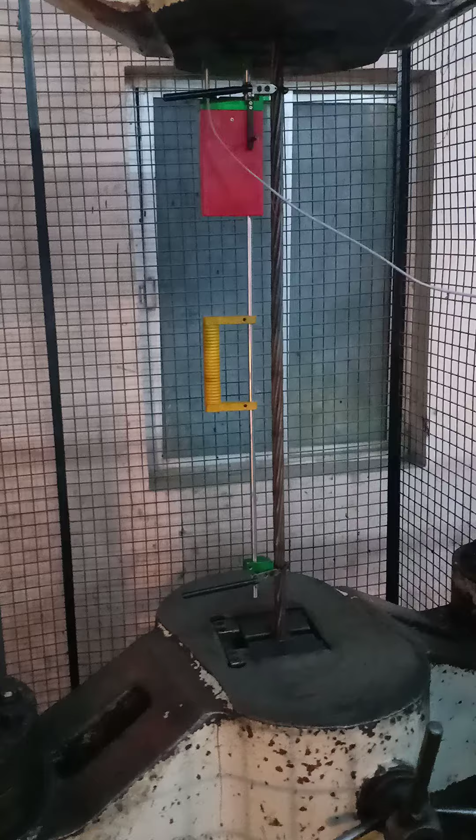Hello everyone, today I'm going to show you a testing of a strand wire on a 600 gauge length. So you can see we are using a computerized model UTM machine. So right now our extensometer is fixed, and it's a 15.2 strand wire. So I'm going to perform this test.

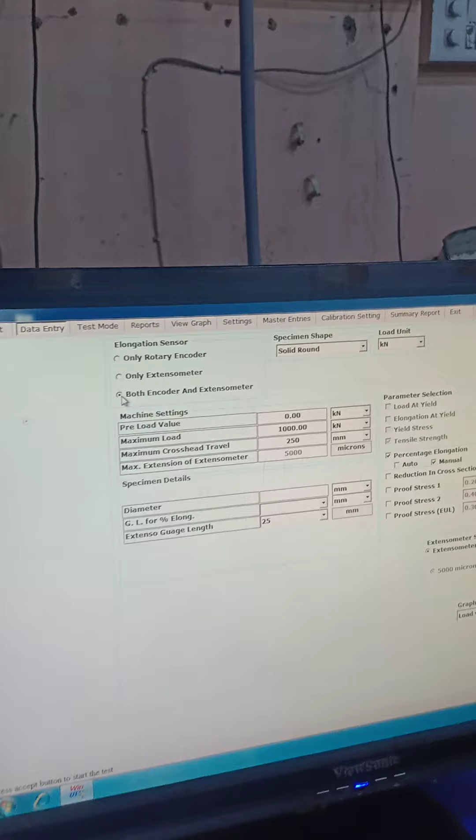This is our standard software. Giving the input data. So here I'm going to select both data, both encoder and extensometer. Diameter is given. Now I'm going to select the gauge length for percentage elongation, gauge length for extensometer, proof stress at 0.2%,

extensometer 2, as we are using two types of extensometer in this. So the 600 gauge extensometer is extensometer 2, so we selected that one. Hydraulic is on now. So giving the file name.

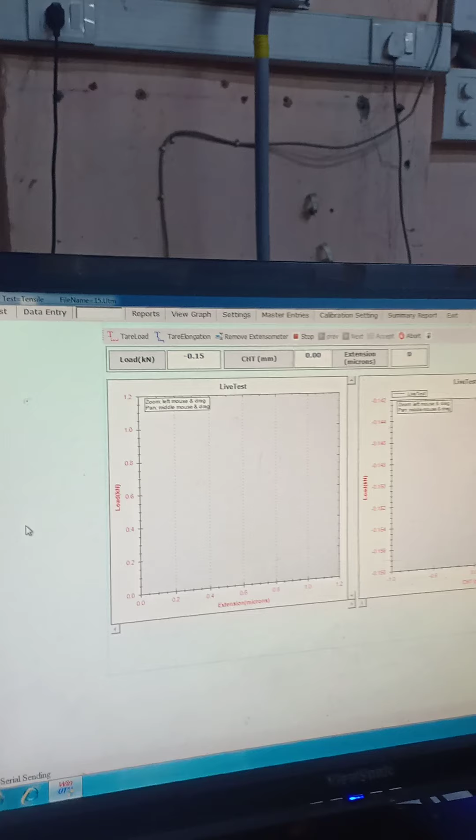Sir, sir. Okay, sir. Tare load.

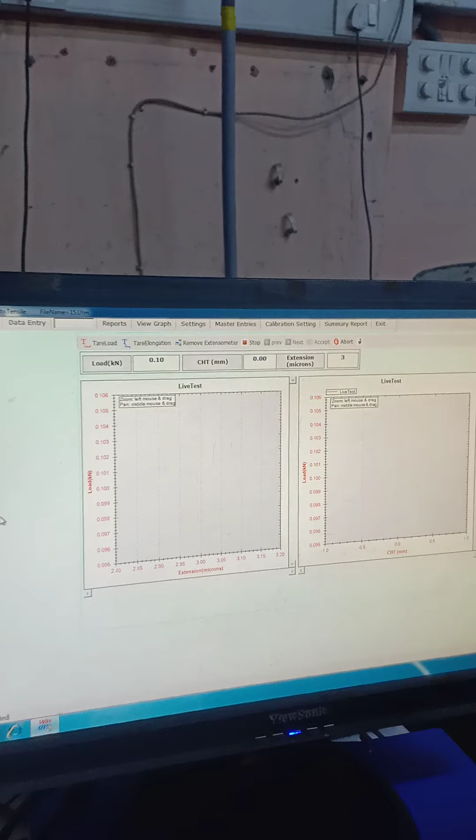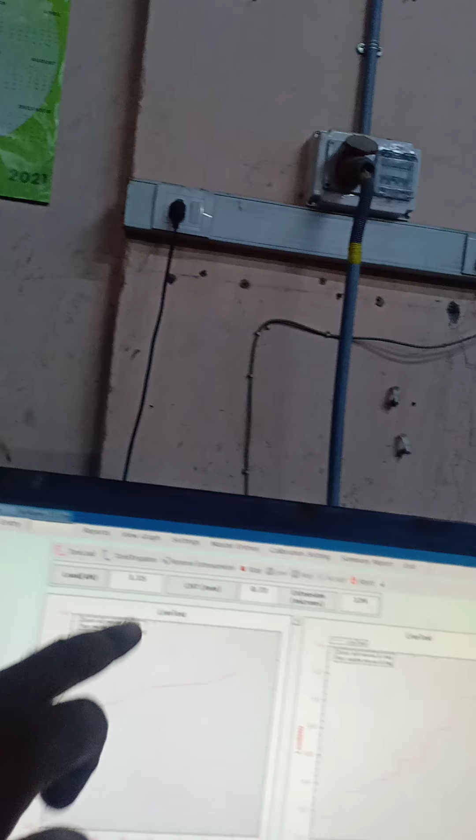Okay, now our testing has been started. So you can see in the report, this is the load versus extensometer graph and this is the load versus displacement graph. So all our data has been started. Load value, this is the displacement value and this is the extensometer value.

We remove the safety pin from the extensometer. Now our extensometer is traveling.

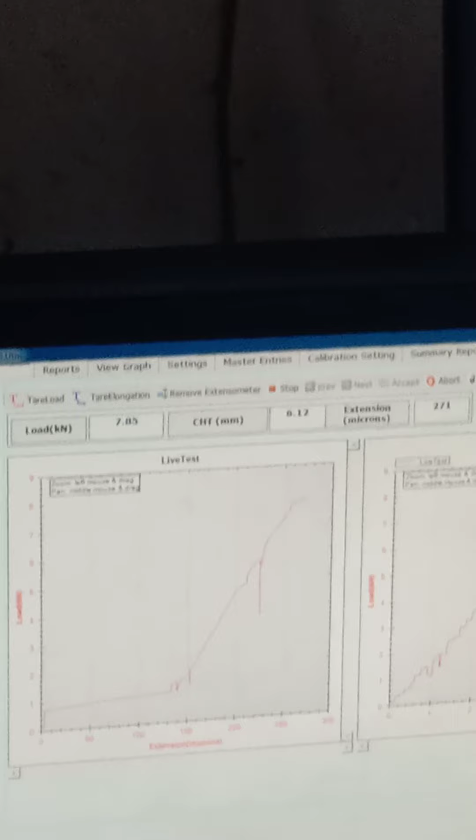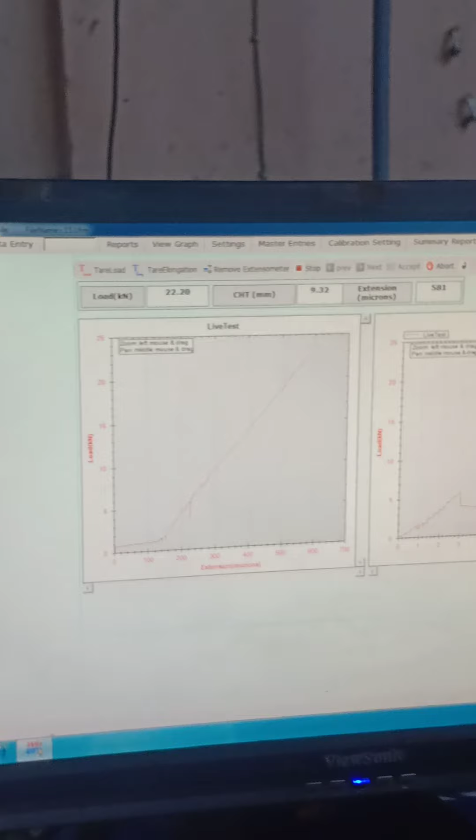Load versus extension graph. Load versus displacement graph.

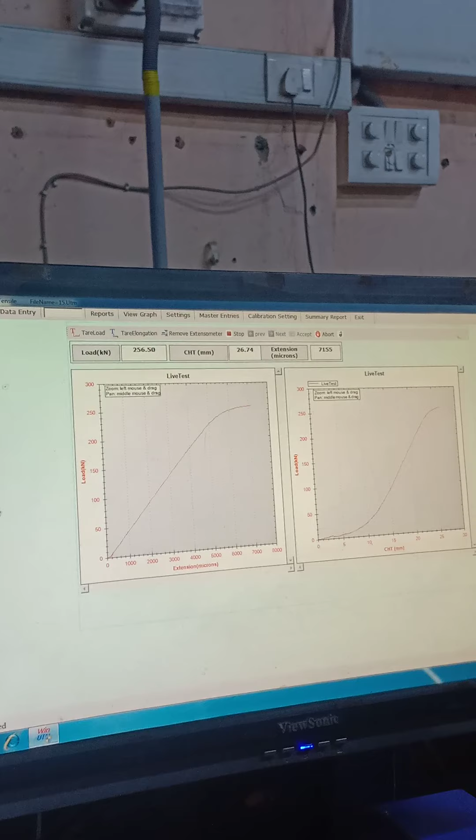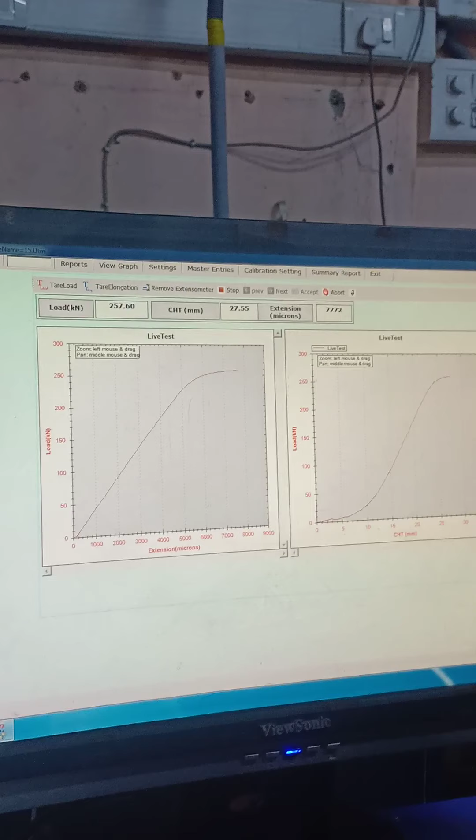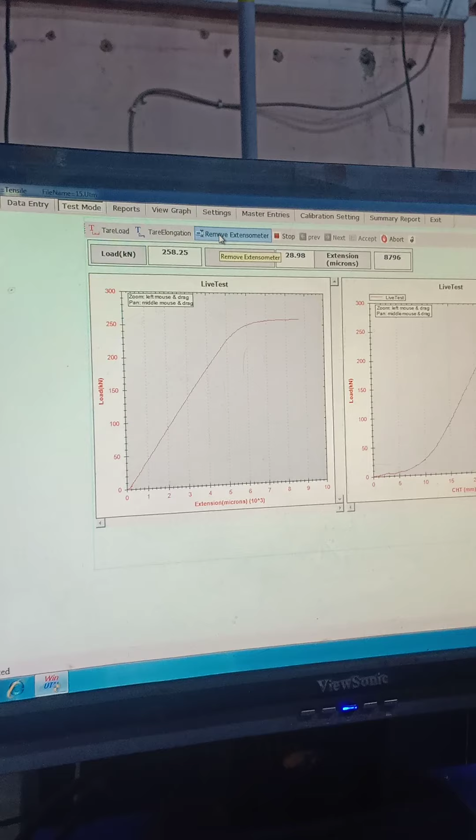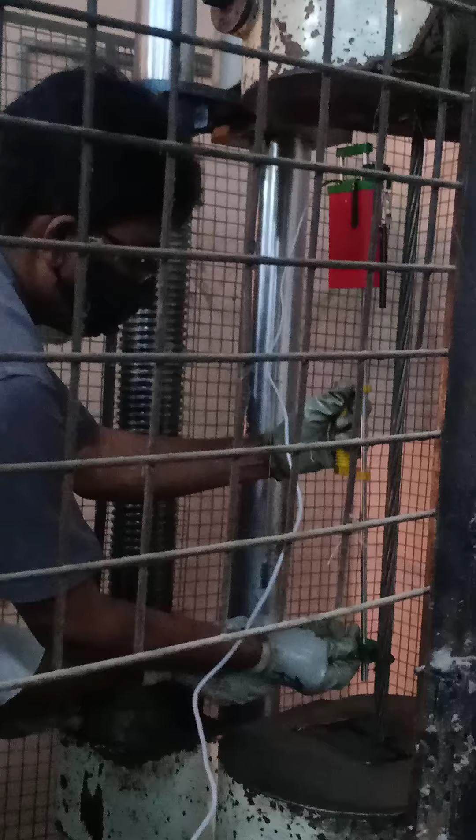Just when 'remove extensometer' comes, we need to remove our extensometer. You can see a message below there, remove extensometer. At that time we need to remove the extensometer. Now our extensometer has been removed.

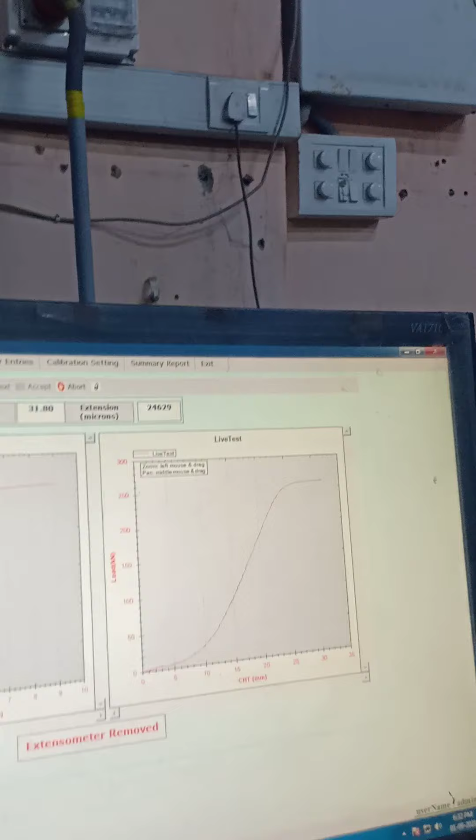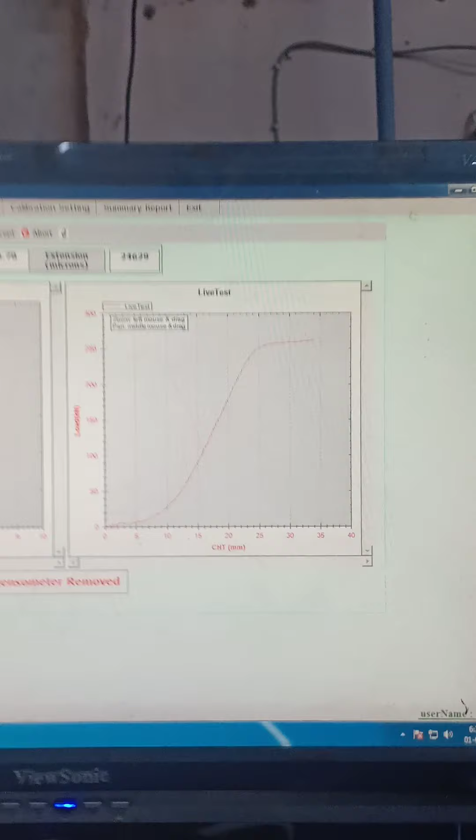Now you can see this graph has been stopped here and only the load versus displacement graph is now moving. So from this graph we will get the 0.2% proof stress, and this is the graph for the rest of the data.

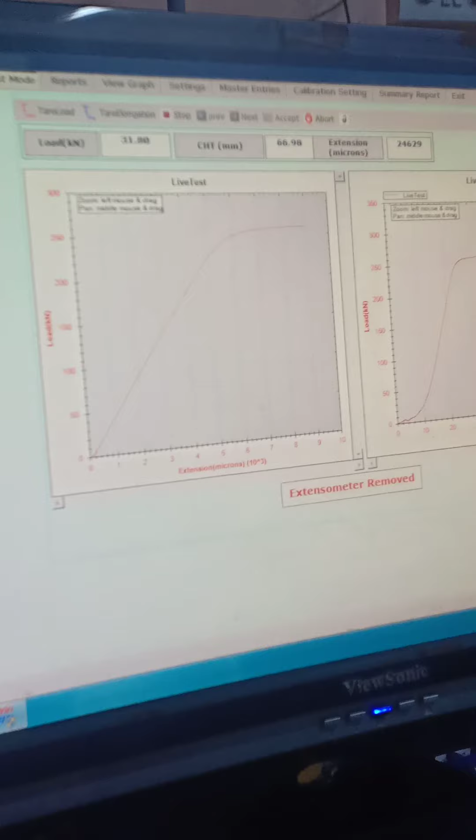So our component has been completely broken down. This is our software data. Stop. Okay. See, now we need to give the final gauge length for percentage elongation.

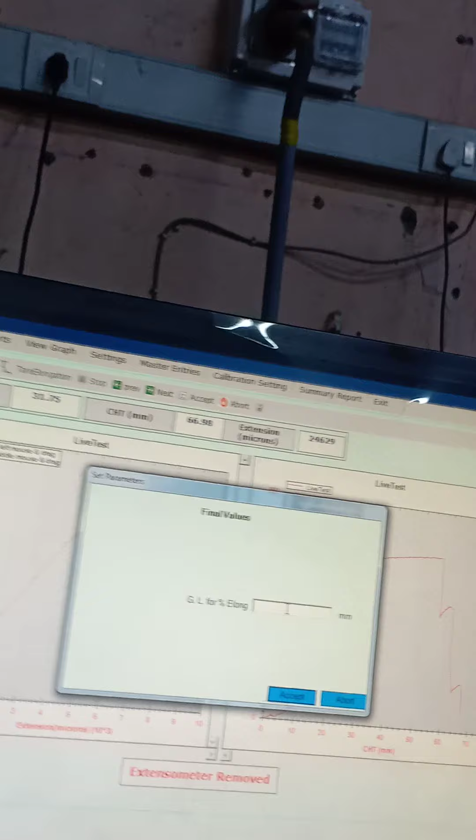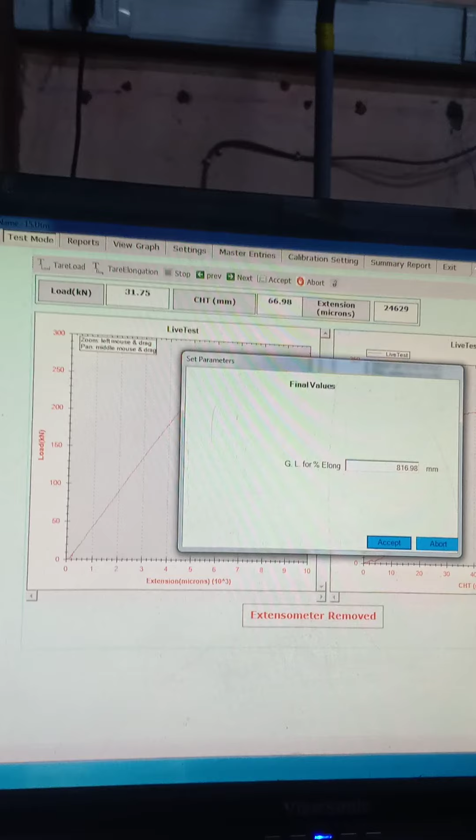Yes, from gauge length. Okay. Accept. Now this is the Young's modulus, which our software automatically calculates. Yes. Now for calculating the proof stress we need to select 2 points. Yes. Then now going to select the first data.

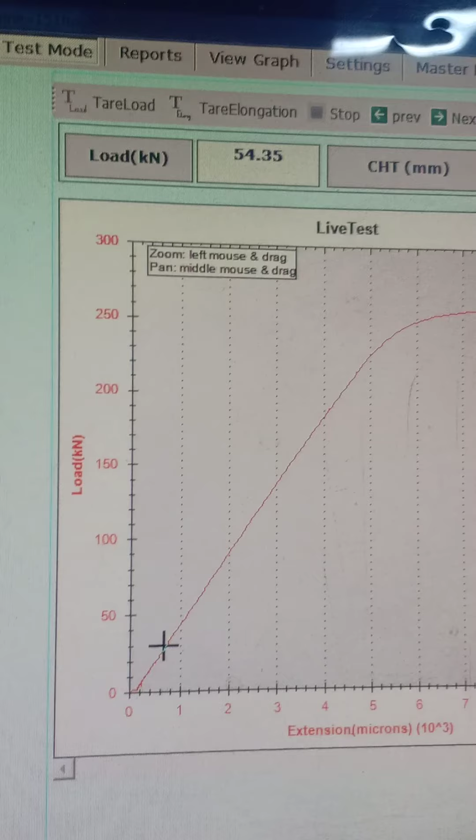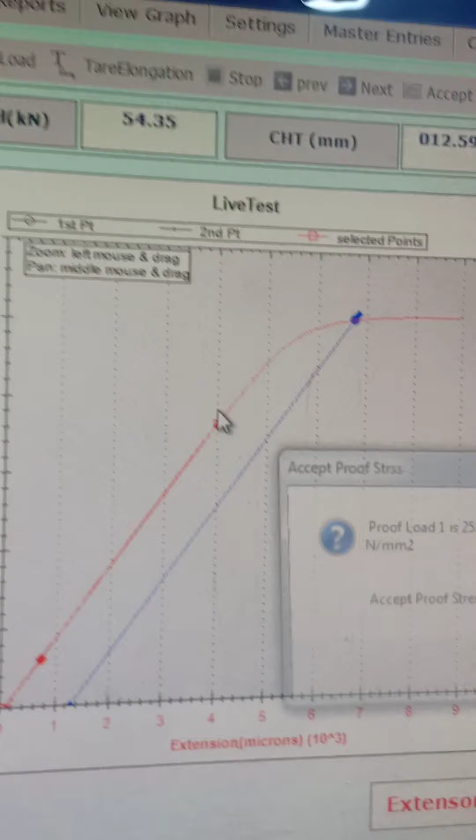Okay. Going to select the first point. First point has been selected. Now it asks for the second point. Going to select the second point. Now you can see a parallel line is automatically drawn, and a proof load is also coming, and the proof stress is also coming. So yes.

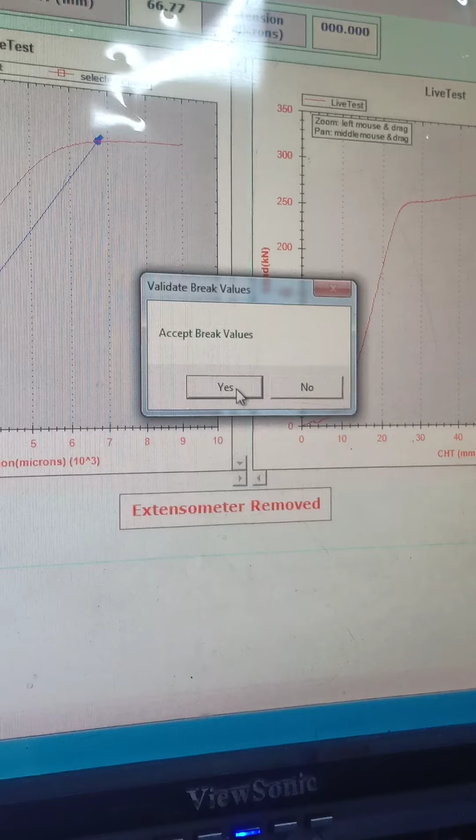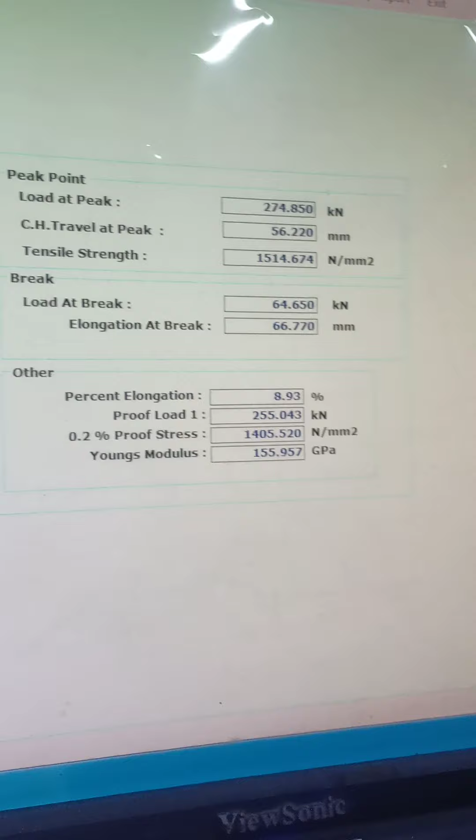Now yes, again for break values. Now it asks for remark. Any remark is there, we can write it down, then click on accept. This is the final data. To take the printout, and this is our report.